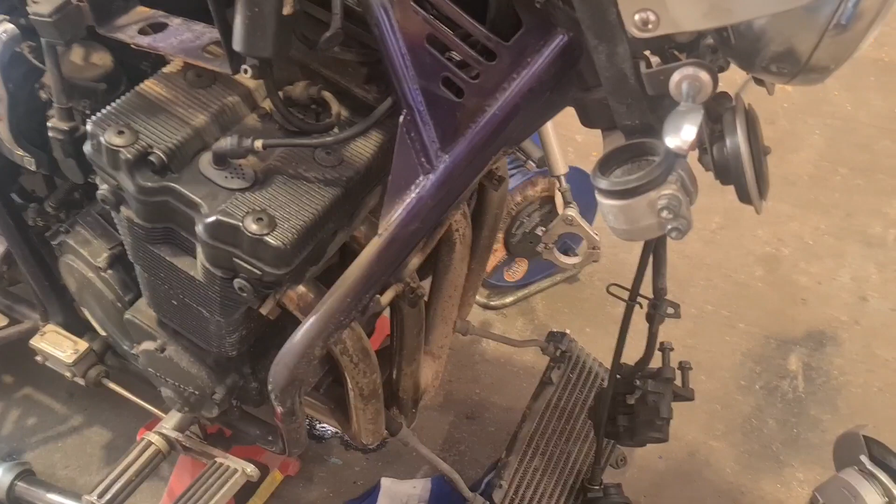And off we go after a day on. So here we are, look, I've just made a start and then thought I'd better record it. We're going to chop out these gussets both sides.

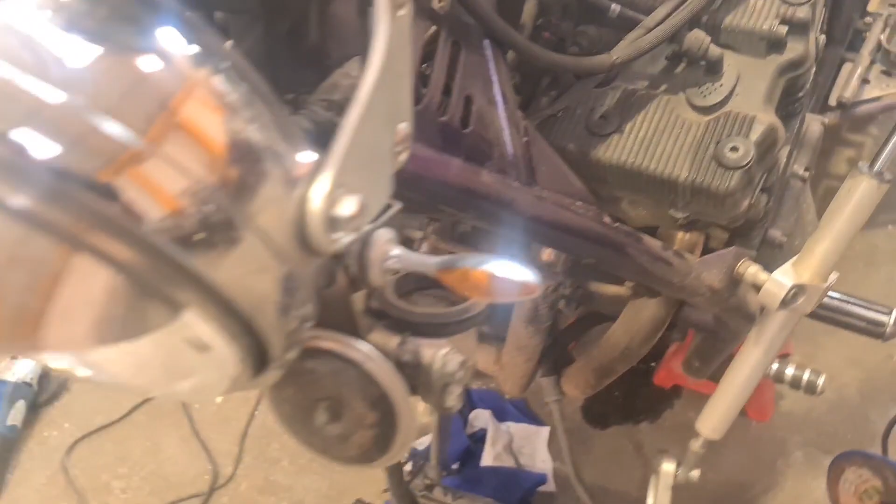Yeah, and then we're going to cut through these frame tubes, not all the way, well, pretty much all the way, both sides again. Here, I think, sorry, there's a join, there's been a repair previously, but it wasn't done straight.

It was done with bent forks and Kev did it, bless him, made a lovely job of it, but the frame's not fucking straight, so there you go. So we're going to chop that out, we're going to get a level on it, we're going to push it straight, and we're going to weld it back up. Isn't it? Simple.

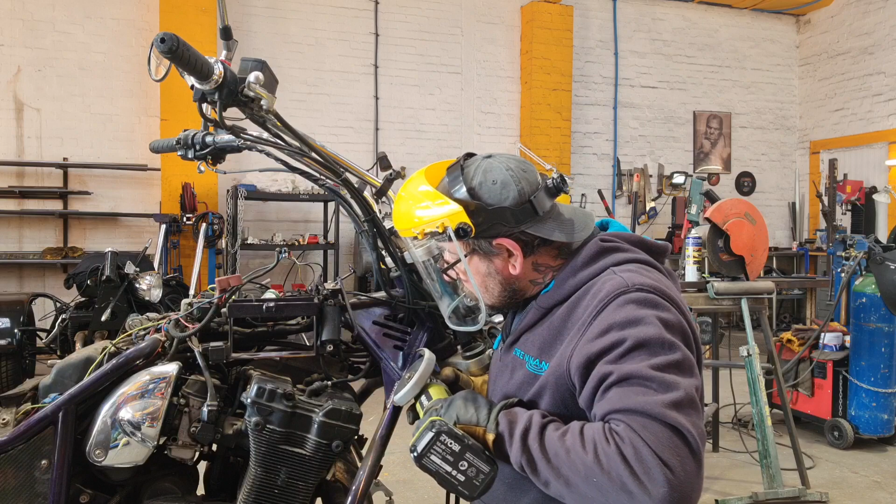We've got it cleaned up, cut through, just left a tiny little bit at the back. Yeah, so there we've not cut.

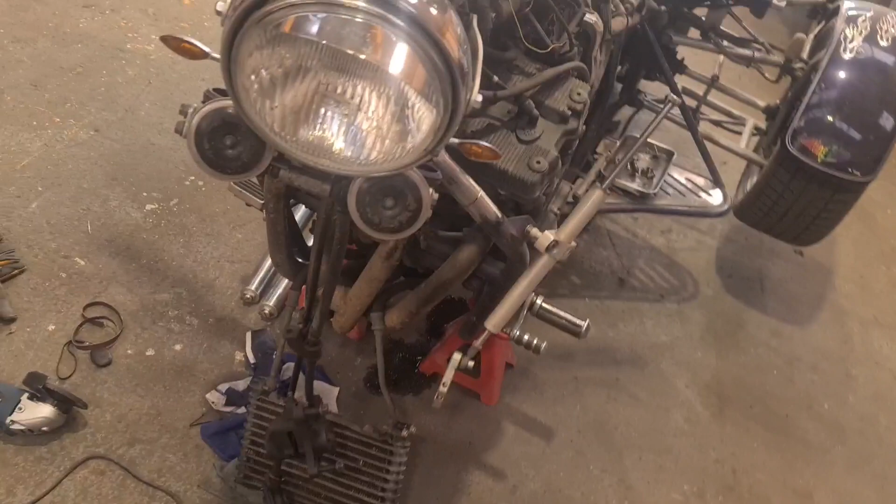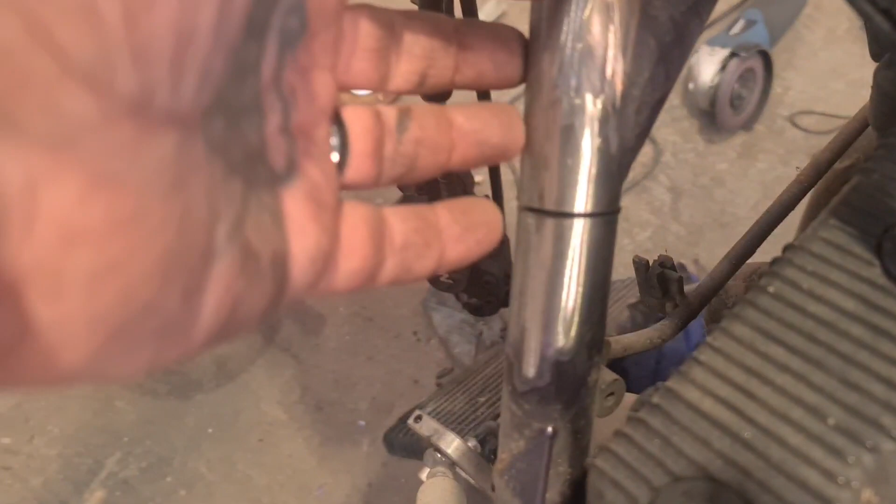And we're going to get the headstock bearings tight because they're loose. I'm going to probably put the forks back in to get a guide off, but you can already see that's moved a little bit. It's jumped a little bit as I've cut it, not literally, it's not trapped my blade right, but it's moved a little bit, so hopefully we can persuade that to come straight.

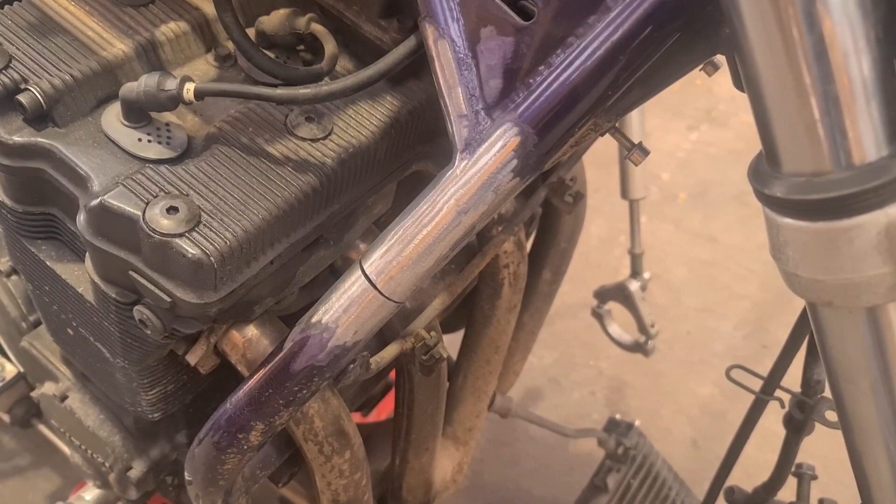So we're ready to weld. Look, we've got a big straight bar across it, we've bubbled it up, we've measured it up, we've jiggled and wiggled and tiggled inside her, and now we're going to weld these up and make some gussets. We've got a big gap and a little gap, we can see where it's moved.

Everything's set on naught, every bubble's in the middle, job's a good one.

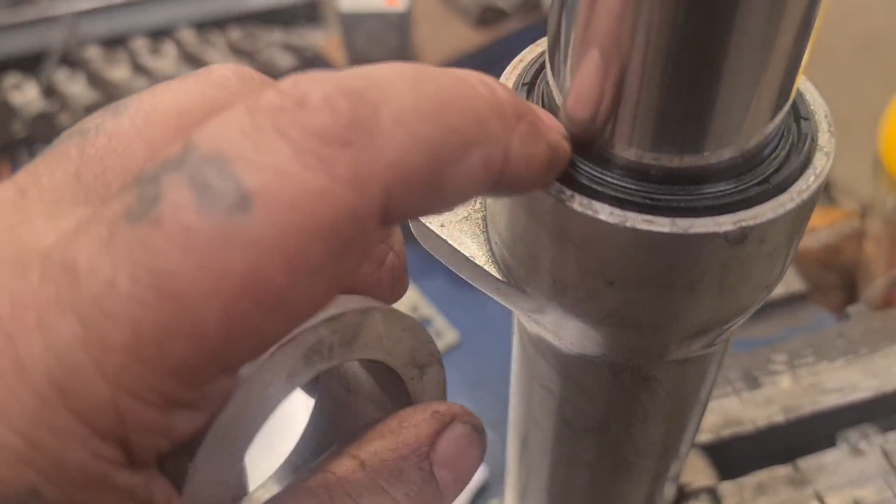So we're changing the fork seals, and what I've done, there's a new one ready to knock in. I didn't film getting the old one out, it's a pain in the arse to be fair, but I've made this drift out of aluminium.

If you follow me, you'll see that I made a spindle protector for the Atlas, and this is one of the rejects, one of many. I've turned it into a tool, so I'll go on there - we can knock that down and it'll press that in without damaging it.

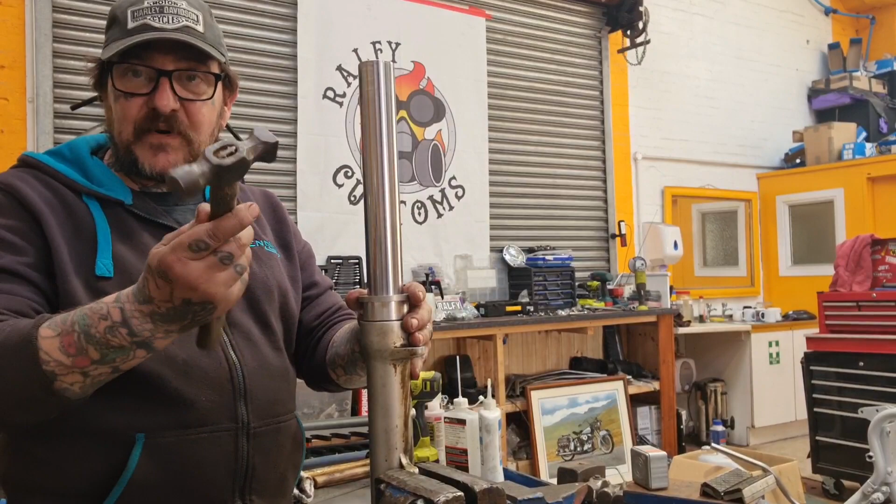So sorted, just a nice little square planishing hammer really. Panel beaters will be turning in their boots, but just tap down, work away around as we go, and it really makes what's a difficult job a pleasure, you know.

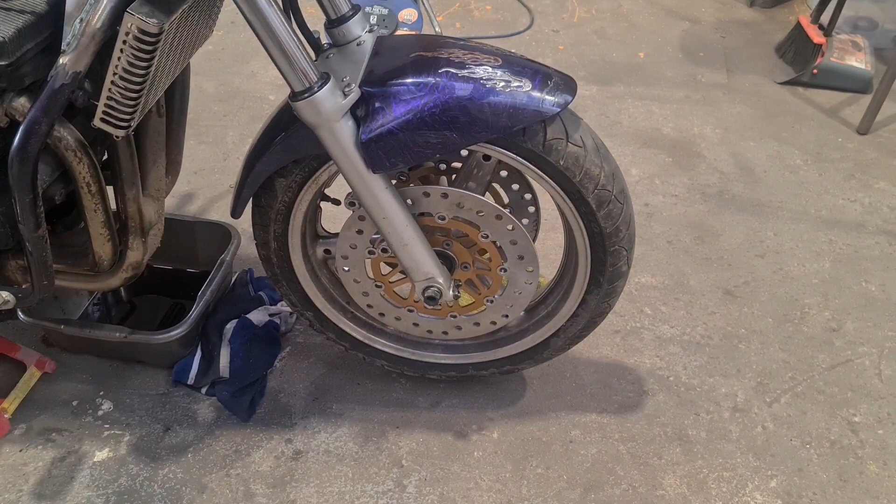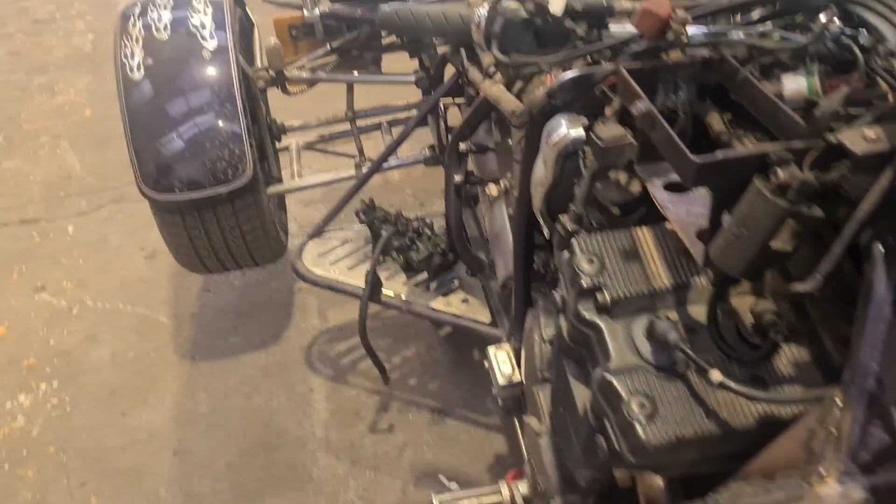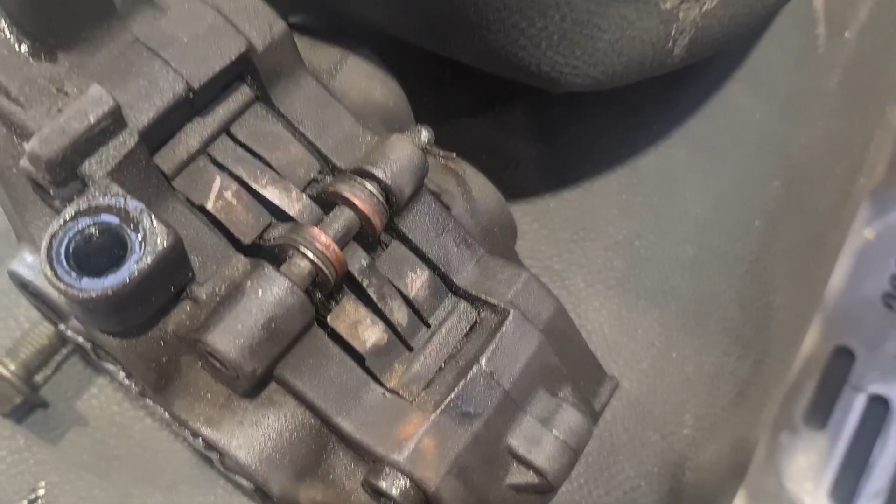There's other hiccups along the way. We've got new plugs in, can't change the pads though. We've got brand new pads that need to go in because of all the oil that's gone into the old ones, and the old ones are worn. But Mr. Suzuki, in all his wisdom, decided to make this a threaded pin, and it threads into the body there. So we've got steel going into alloy, and that's a recipe for some fusion, and we just can't get them undone basically.

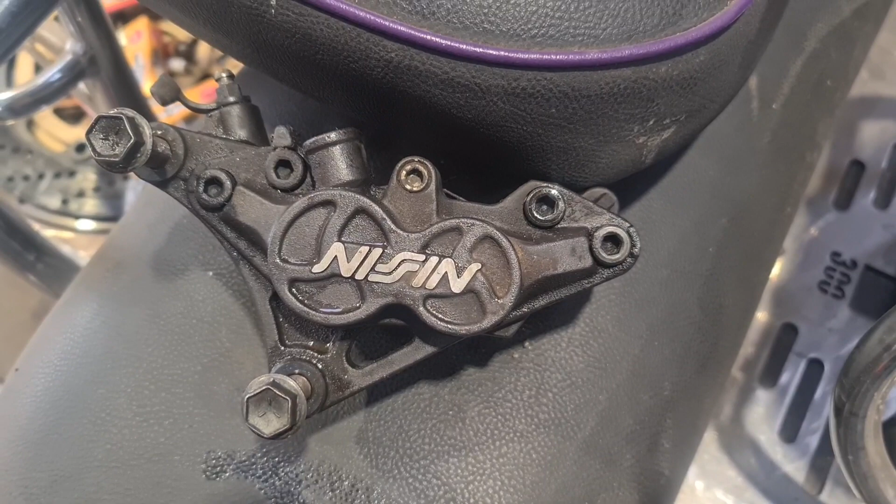So I might end up machining those out and replacing them with new, it's most likely what's going to happen. I don't want to put any heat on there because they're full of brake fluid, and brake fluid when it gets hot is extremely flammable, so we'll see.

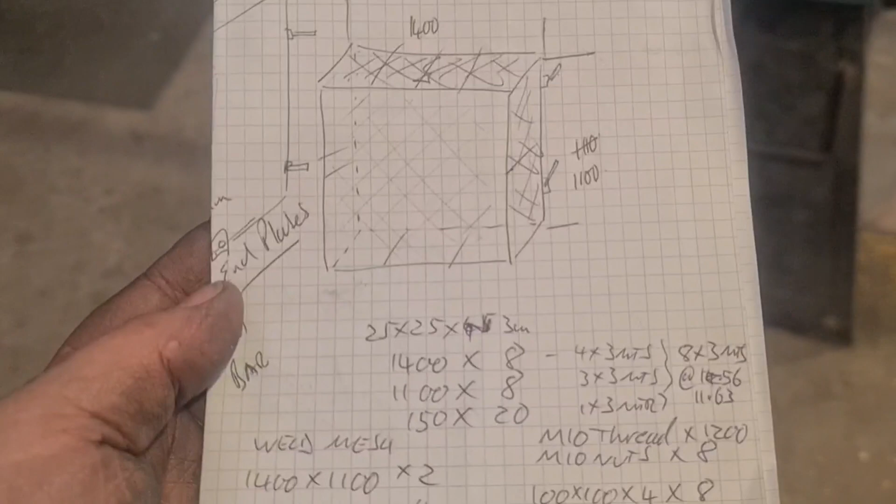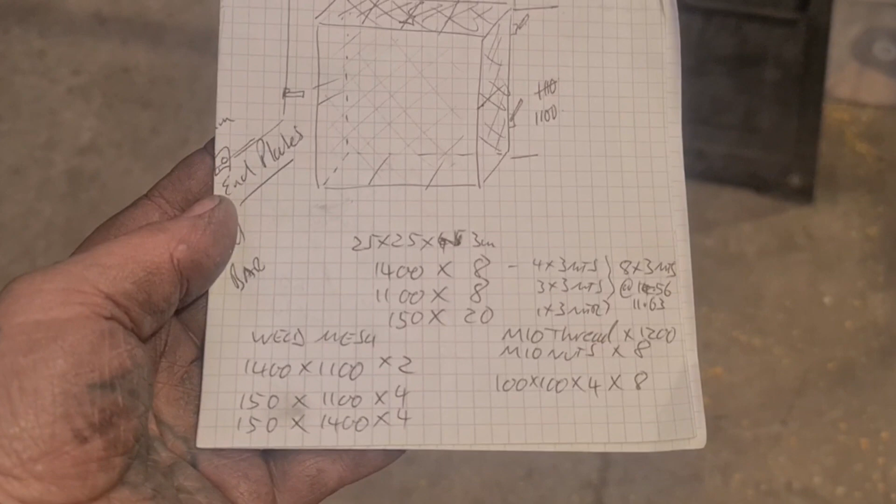Armed with my usual blueprint, this is a good one for me, isn't it? We'll be cutting, mitering and welding up some framework, and then lining it with weld mesh and making fixings for it as needed. Let's get on.

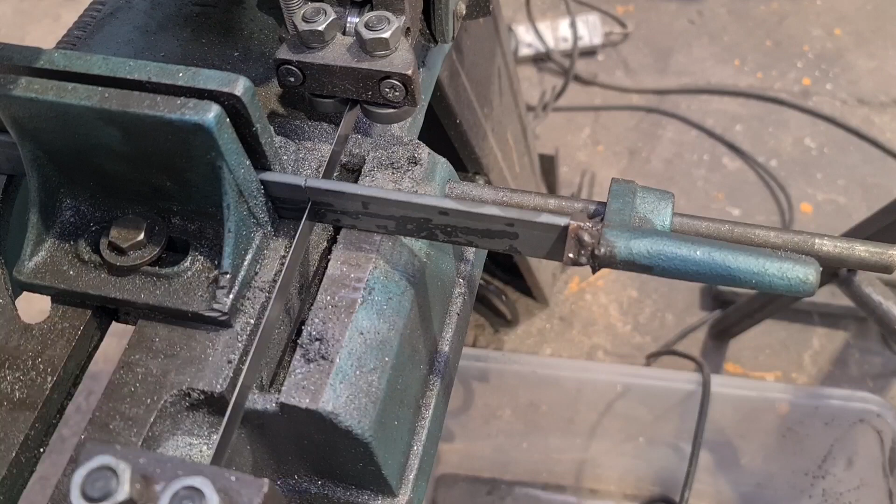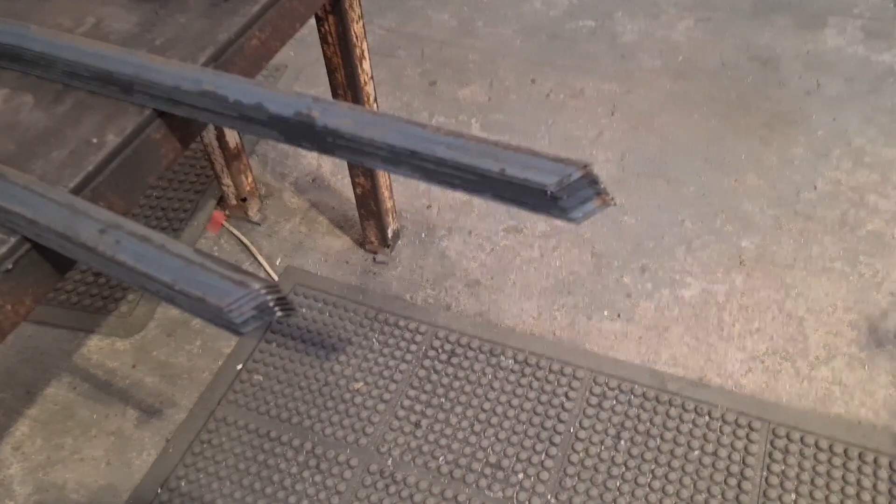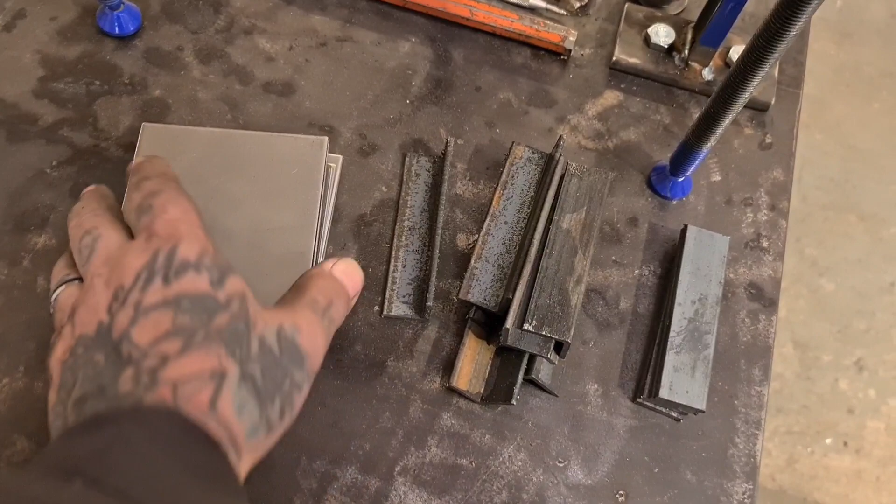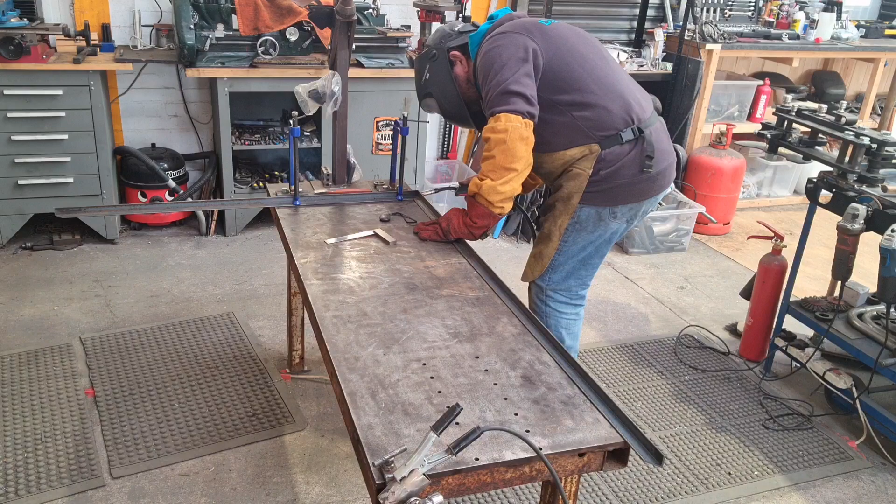What I'll do, because obviously the frame's so much bigger than my table, I'll join two pieces together at a time, and then we can go from there. I'm not sure, I can't really lift it high enough and look at the screen to get it in shot, but here's my solution.

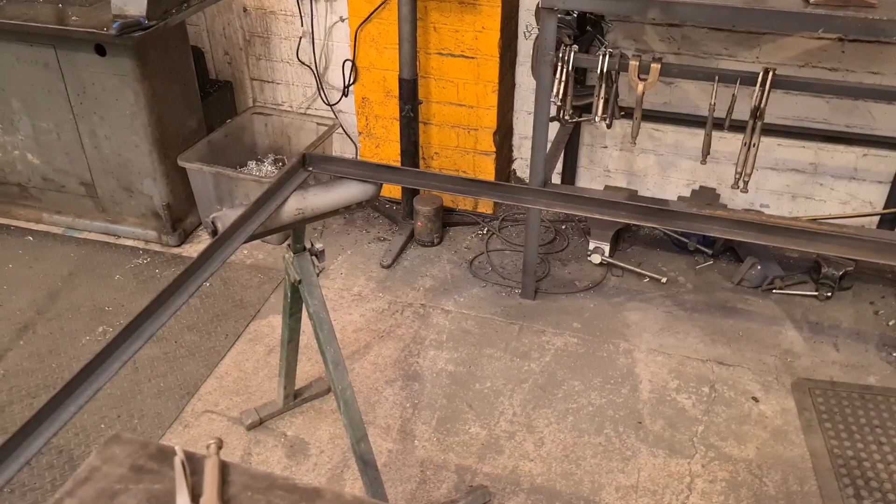We've got a standard adjustable light stand in the corner. We've got that corner clamped. That corner's welded, obviously tacked up. This one isn't clamped, and then we've got a magnet holding this one. So I'm going to tack that, measure across the corners to make sure it's square, and then have a weld up. Wash, lather, rinse, repeat. Here we go.

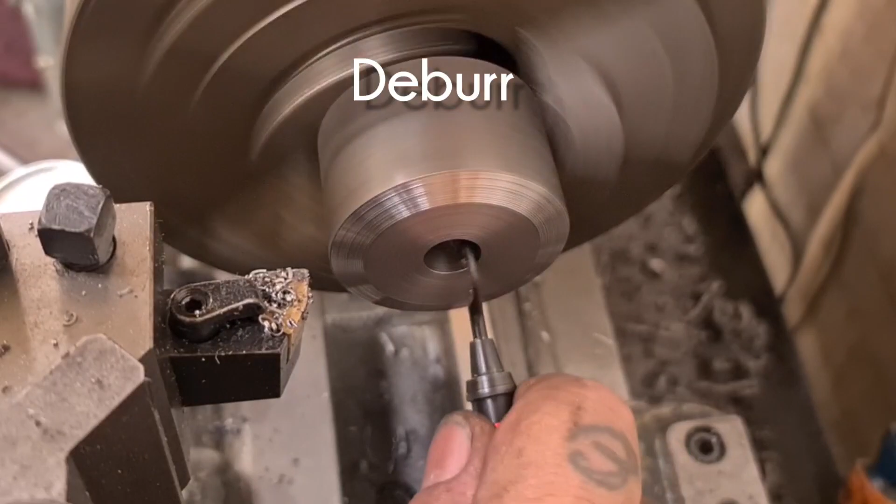So I'll deburr it. No. Yeah, I'm cutting the water off now.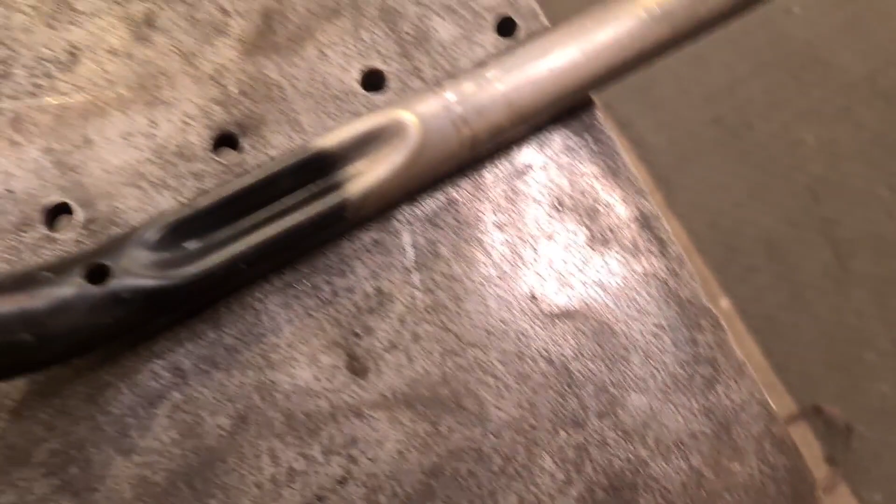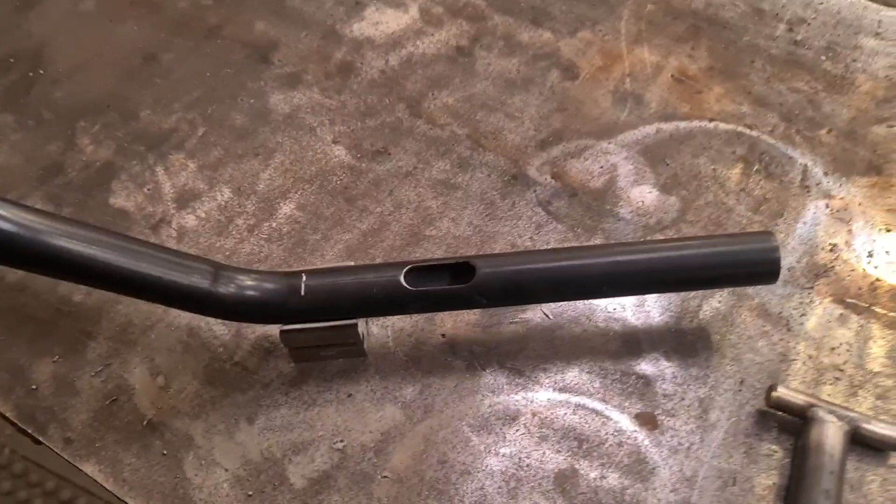What I've got is not these bars. Right, you see these dimples for the wiring. So the controls bolt on here somewhere and the wires come through and you have a little clip there actually, and down they go and away. Now on these bars there's not that. These have got holes, a different sort of switch gear they're made for. So the wires go into the bars and come out here. And the job's a good one.

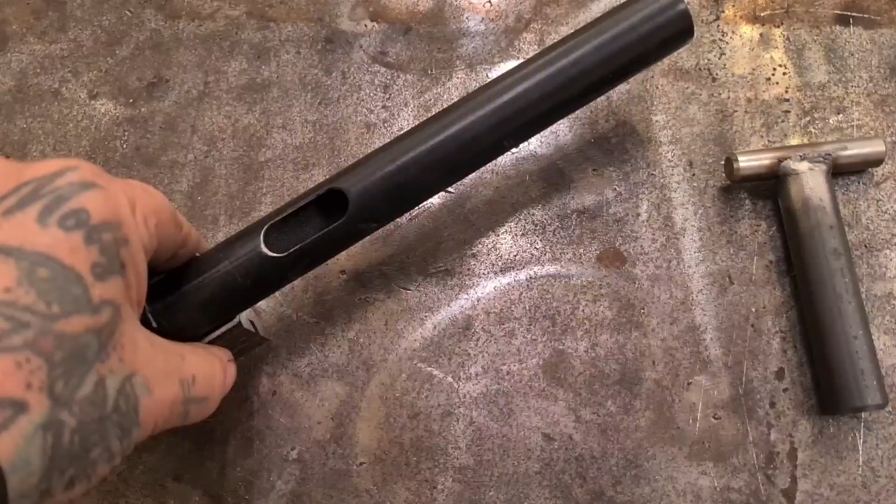Now my mate Titch has got the kind of controls that need the dimple. So I've made a little former out of a bit of round bar, two bits of round bar, and I'm going to heat this up to a nice cherry red, and I'm going to knock that into place there, and hopefully we'll do that for him.

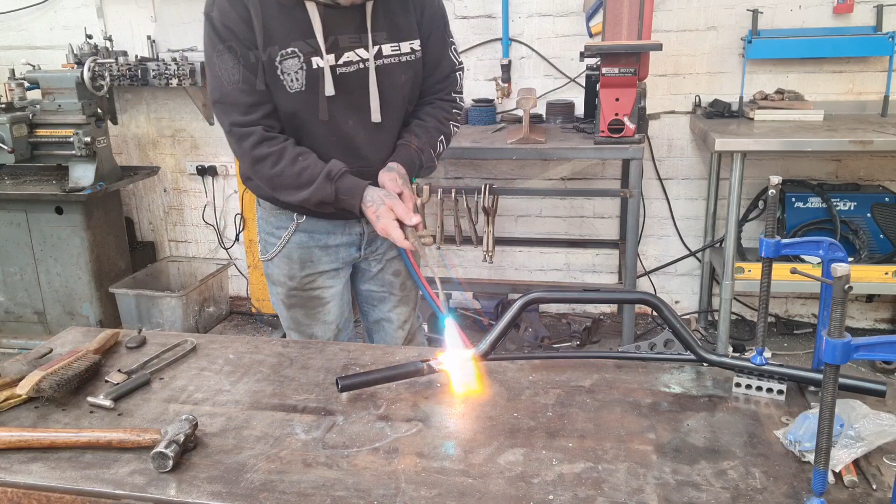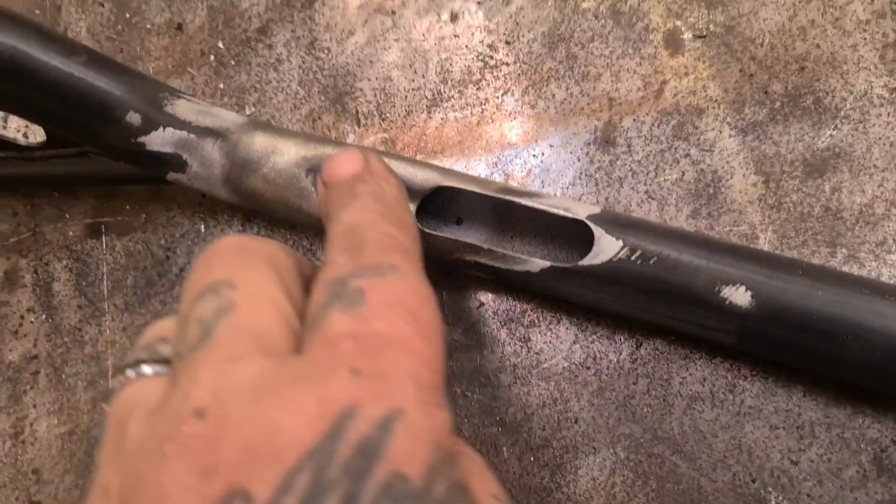And there we have it, dimpled away. This one's not quite as deep, but it goes nearer the bend. He marked them where he wanted them, so hopefully the job's a good one.

Next up, we've got an oil tank that's got a slight crack in it underneath there that needs welding up. But it's come to me and it's still got more than a healthy dose of oil in it, so I can't be welding it up with oil in, so I'm using this water-based degreaser out of my bath to give it a bit of a rinse out, and then I'm going to flush it with water and weld it up.

So we've washed and rinsed and done all that. As you can see, I don't know if the camera will pick it up, that little black line - that's the crack. With a bit of heat on, I think that'll show up more. And I'm going to run some brazing. I'm going to use these self-fluxing rods just to pull a bit of brazing now. I think that'll be best to seal that up.

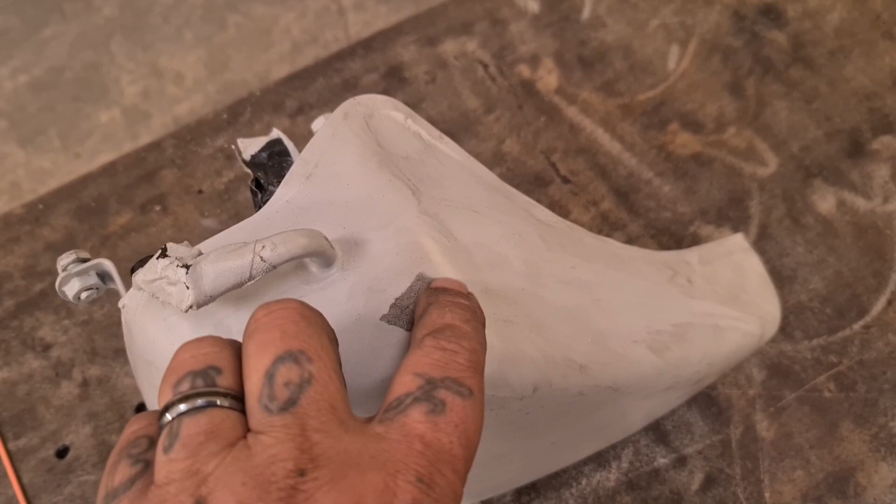If I try and attack it with a MIG or the TIG, well, it's never going to be clean enough to TIG weld because it's an oil tank. I can try and spot it with a MIG, but I reckon it'll just blow through. We'll give it a go with the braze, eh?

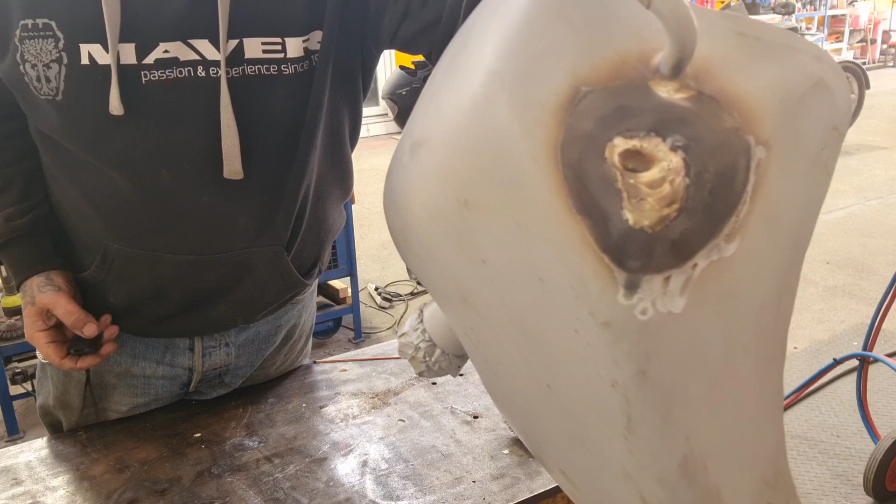So, there we go. We've pulled some braze over that crack and hopefully that'll be spot on.

So, there you go. Now then, that's another week. Steady week. Weather's good. I'm off doing stuff that's not workshop involved. Don't know how interested in that you are, so I've not really included a lot.